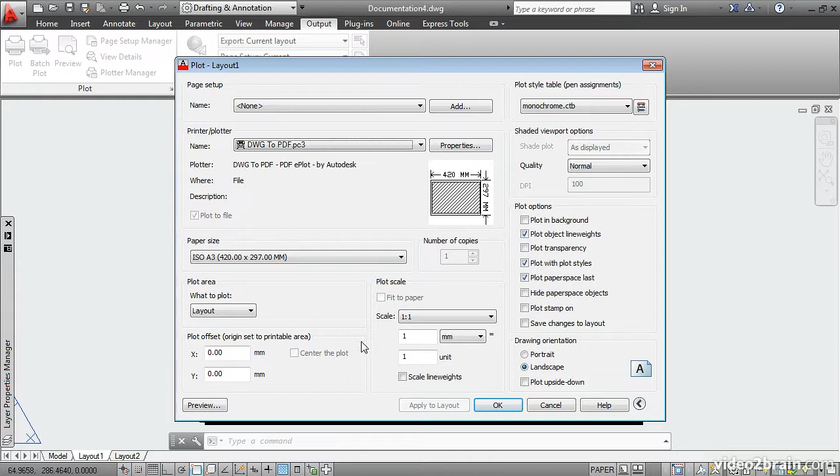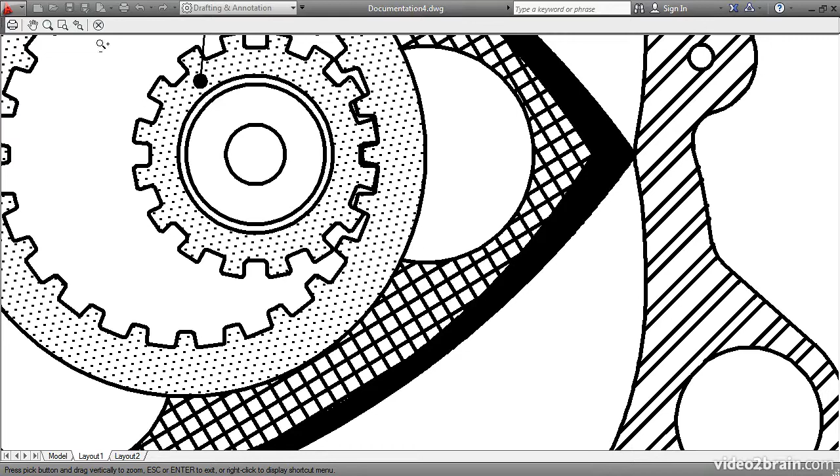It's always a good idea to preview your output before you send it. So click Preview. Zoom in closer because what you see here is what you're literally going to get. The line work here in the hatch patterns is too thick for my liking. I'd like to make that thinner before creating output. So let's cancel out of the preview and then cancel out of the plot command.

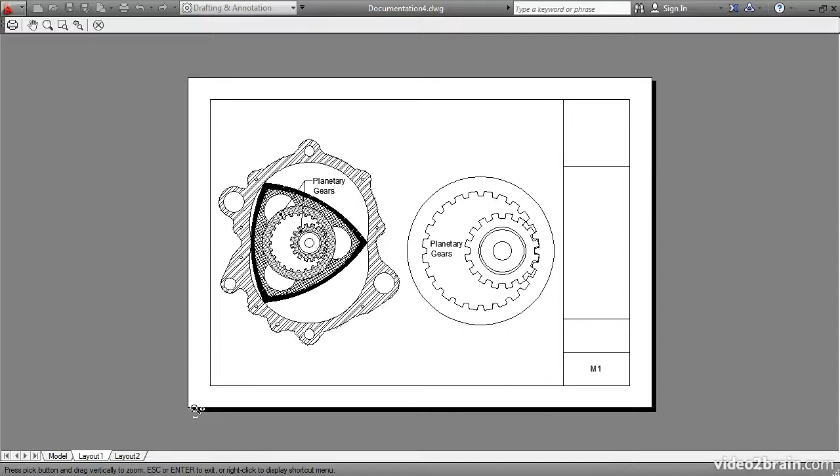Open the Layer Properties Manager and change the hatch layer's line weight to something thinner. Let's try 0.15 millimeters. Then go back to the plot command, take a look at its preview, and zoom in. This is going to look much better.

To send the plot, click this icon. If we were sending this to a physical device, it would start printing right away. But since we're creating electronic output, it prompts us to save a file name. And it gives us a suggested file name, which is the drawing name -layout1. Click Save.

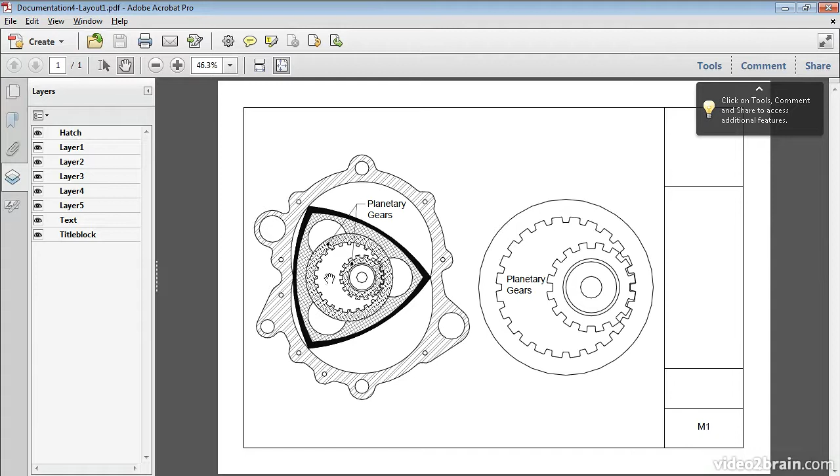My computer is configured to open PDF files when they're generated, so I see this here in Adobe Acrobat Pro. I can zoom in here and take a look at the output. It looks great. This is what someone would see if you sent them the PDF, even if they don't use AutoCAD. Now I'm going to switch back to AutoCAD.

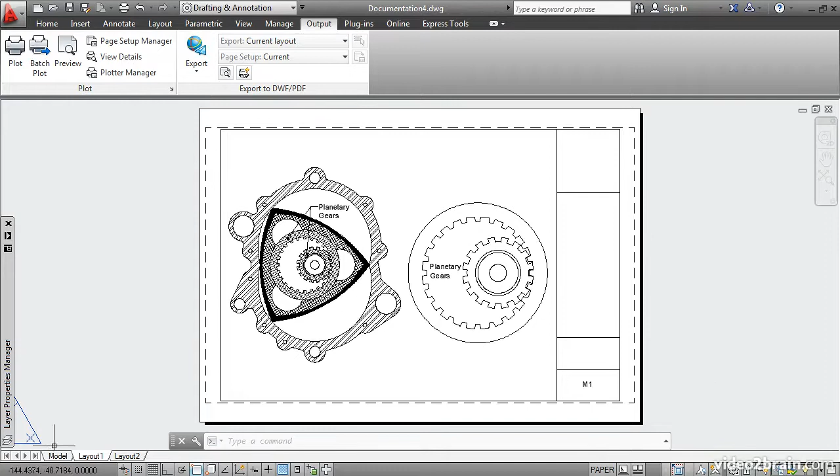Notice that we have a balloon notification here just telling us that the plot and publish job is complete. We can close this. Now let's switch to Model Space by clicking the Model tab. This time, let's create a plot directly from Model Space. Click Plot. This time we have to choose what we want to plot.

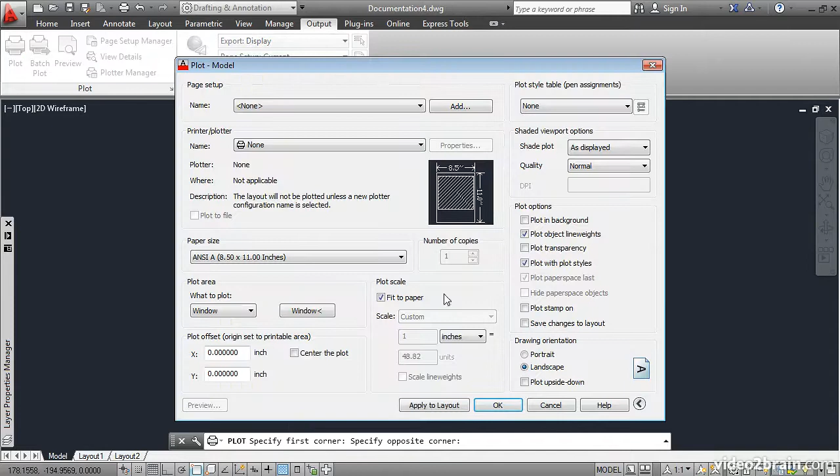I'll choose Window, and then click the two opposite corners of a rectangle to surround the area that I want to output. The preview here shows the hatched area is my drawing, and this is the paper. I need to choose a printer driver first. This time I'll choose DWF6 ePlot to create a DWF file. This can be opened in Internet Explorer and in Autodesk's Design Review application.

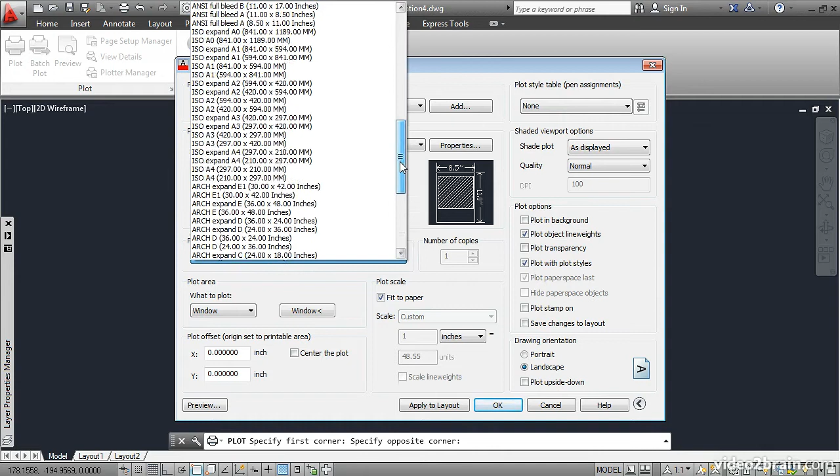Let's change the paper size to ISO A3. Let's also choose to center the plot by checking this box. See how the preview jumps over when I check this?

If you want to plot it out so that the drawing is at its maximum size on the paper, you can leave Fit to Paper checked. If, however, you want to plot it to scale, uncheck this and change the scale. Let's set it at 1:2.

I'll choose a plot style table here, monochrome. You're prompted if you want to assign this plot style table to all layouts. We've already assigned it to the page setup on layout 1, but I'm going to choose No here because we might not want to assign it to layout 2. Then I'll go ahead and click Preview.

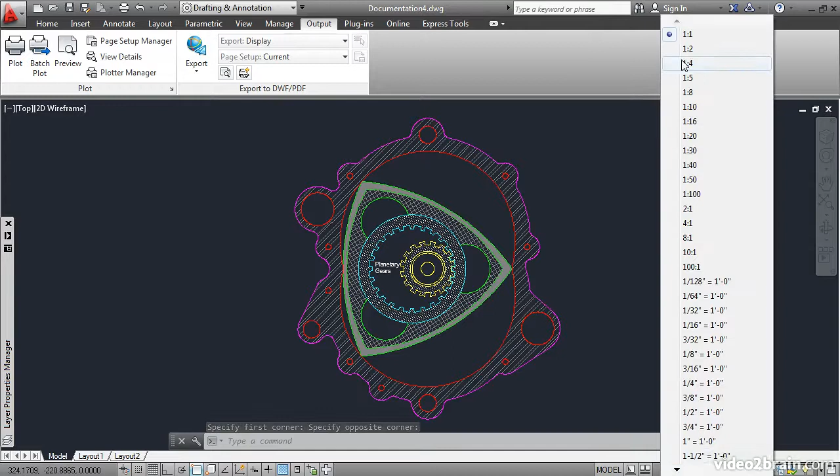It warns me that the annotation scale is not equal to the plot scale. Do you want to continue? I'll click Cancel, and then cancel again. I'll change the annotation scale to 1:2. Then I'll go back to the plot command again.

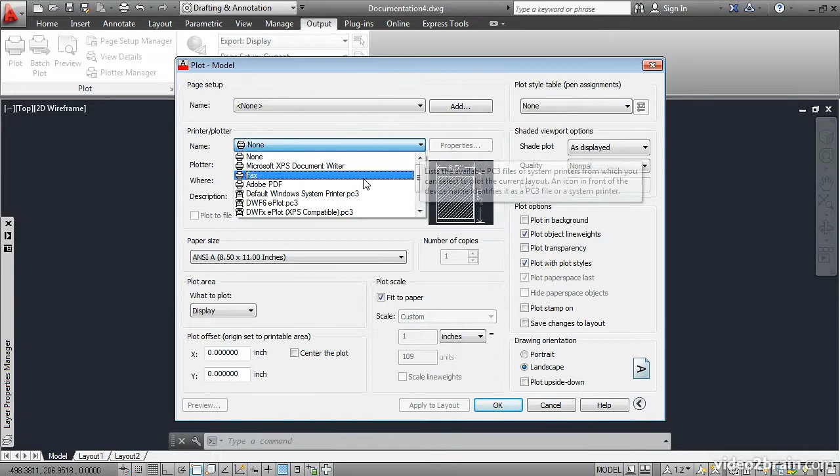But none of the things that I configured the first time around are saved. So this is the main disadvantage of using Model Space to plot. You also don't get the title block that was drawn in the layout. So I have to go through again and select everything as I did before.

I'll select the plotter, the paper size, what to plot, the plot scale. I need to center the plot also. Choose the plot style table. Choose No, and then preview again. I'll zoom in. This looks good.

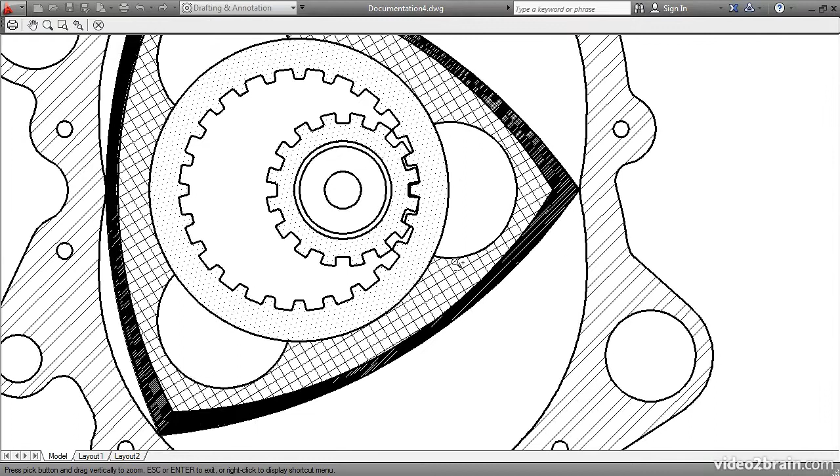I'll go ahead and create the DWF file, and I'll save it with its suggested name. Again, you get a balloon notification which you can immediately close. In this lesson, you learned how to use the plot command and its plot preview feature to verify your intended final drawing on screen prior to processing it as electronic or physical output.